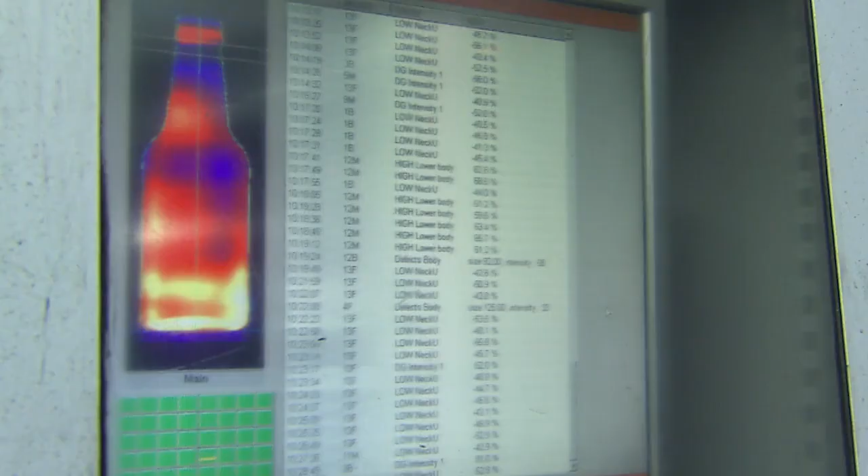More than 2,000 years ago, the first glass bottles and jars were made. Since that time, glass has continued to evolve, but the many great qualities have remained the same. As you will see, glass is made from natural, sustainable, raw materials and is 100% recyclable without any loss of quality or purity. Our customers count on us to consistently deliver innovative glass packaging that preserves the taste and freshness of the products inside. We invite you to take a look inside the science and art of glassmaking. It is a remarkable process where raw materials are converted into glass bottles and jars that contain the foods and beverages that you buy and use every day. Cheers to glass.

These glass containers may look empty, but a lot of science, engineering, and attention to detail go into making them. In fact, consumers nationwide trust glass bottles and jars to protect their foods and beverages, and many of them choose Ardagh Glass Packaging to provide distinctive glass containers.

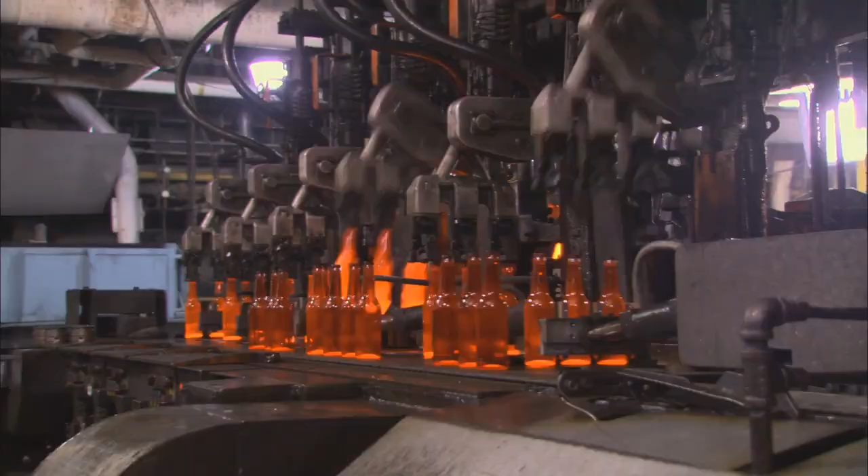We make approximately 6 billion glass bottles and jars a year. We are continually upgrading our facilities and processes to further improve the quality of the products and production efficiency. Ardagh Glass Packaging is focused on crafting quality in every container.

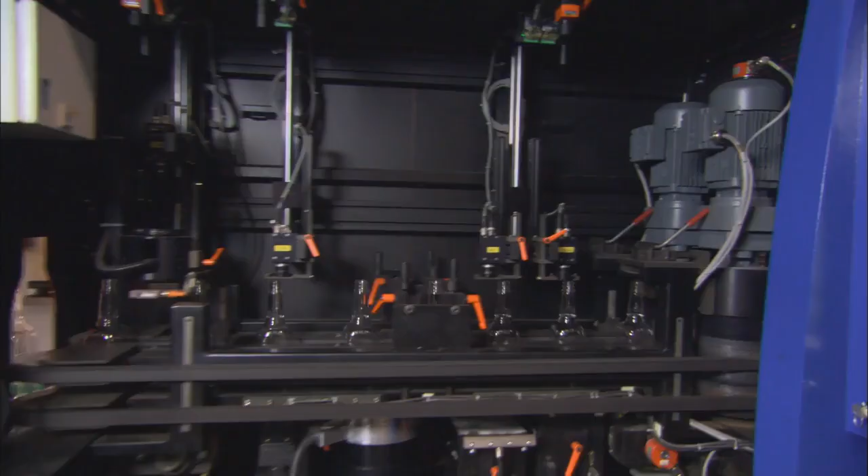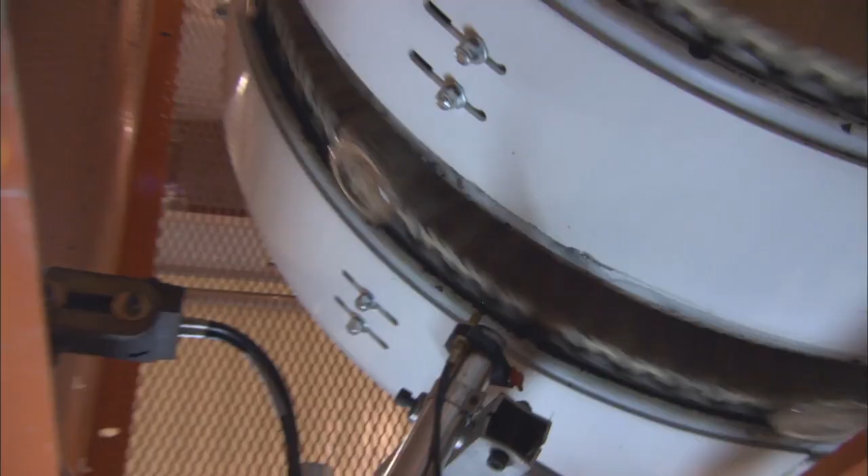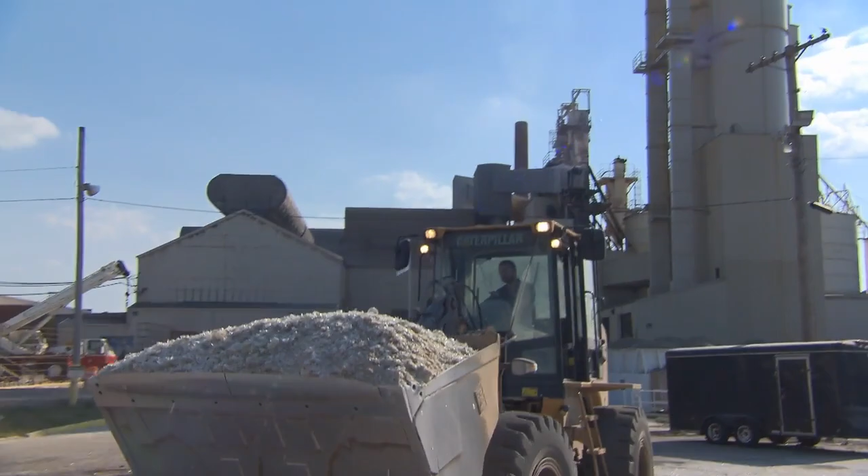Our scientists, technologists, and engineers identify emerging technologies and evaluate them in our manufacturing facilities nationwide. Technologies that pass these rigorous evaluations are gradually implemented into our manufacturing facilities. We have made a company-wide commitment to sustainability by reducing the use of raw materials, optimizing energy consumption, managing waste and water, and decreasing greenhouse gas emissions in all of our offices and glassmaking facilities.

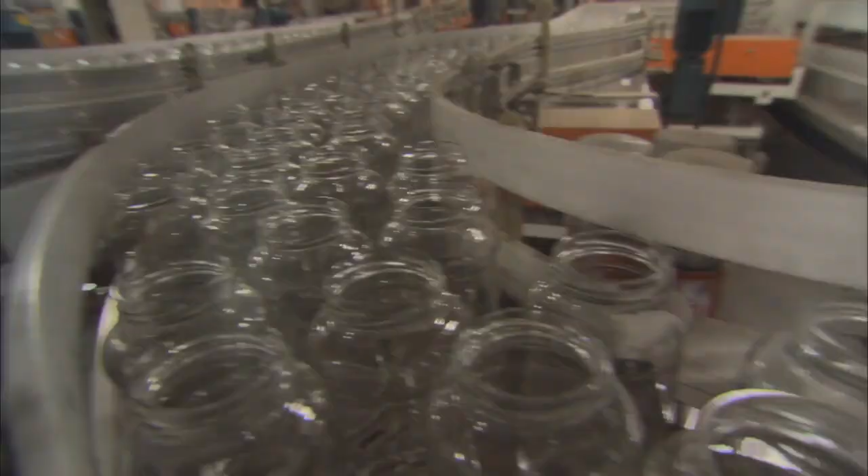We manufacture bottles and jars for the food, beverage, beer, wine, and spirits markets.

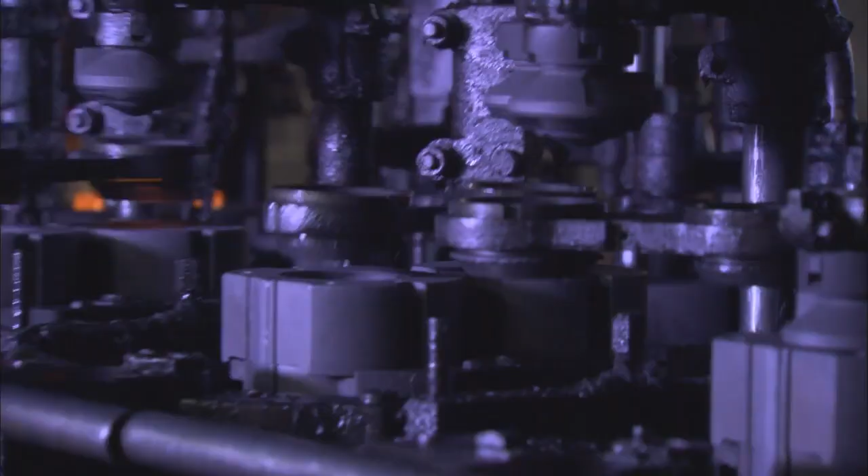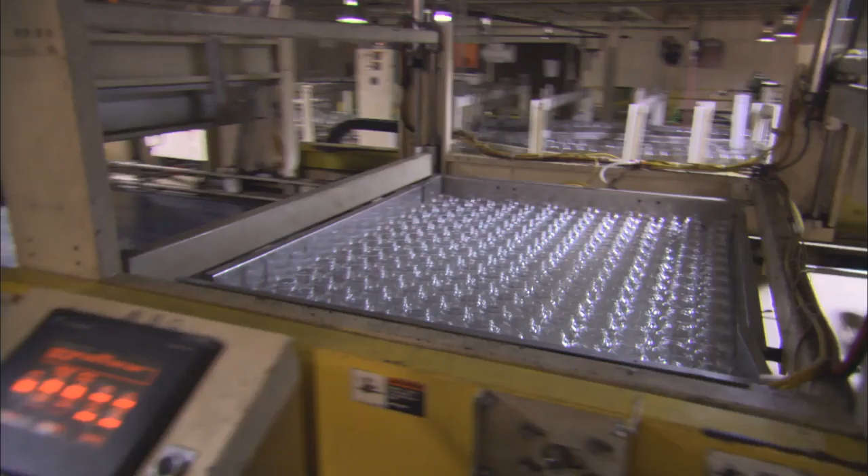Glassmaking is a very complex process. We meticulously control the production process from start to finish. Making glass containers that will stand up to customers' filling processes and consumer use is a demanding, highly scientific process.

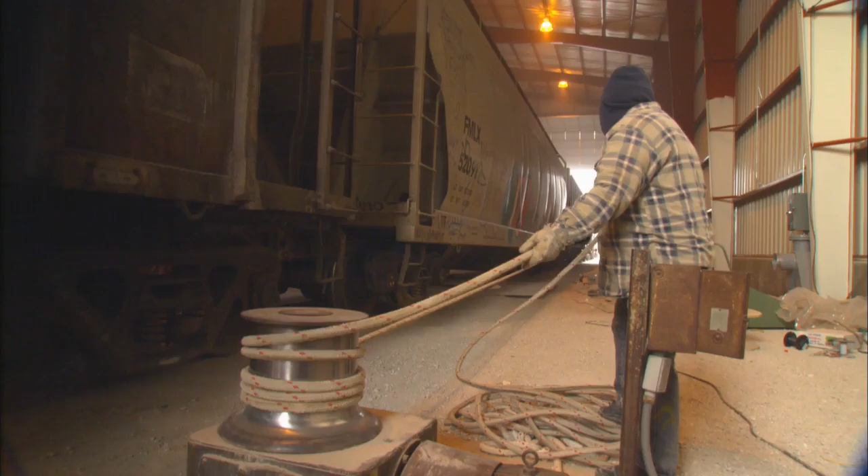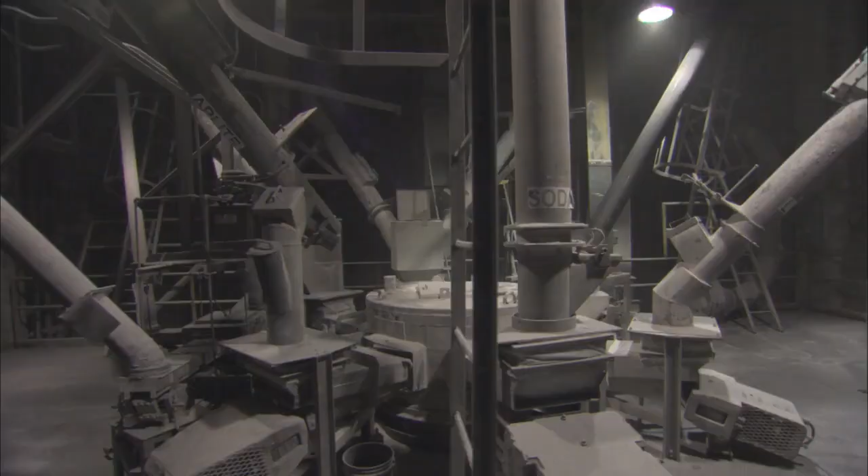The primary ingredients of glass are all found in naturally occurring resources, which include sand, soda ash, limestone, and dolomite. Upon arrival, these materials are inspected and stored in huge silos. Raw materials are conveyed to the batch house, where they are weighed and combined with minor ingredients to create the batch mixture.

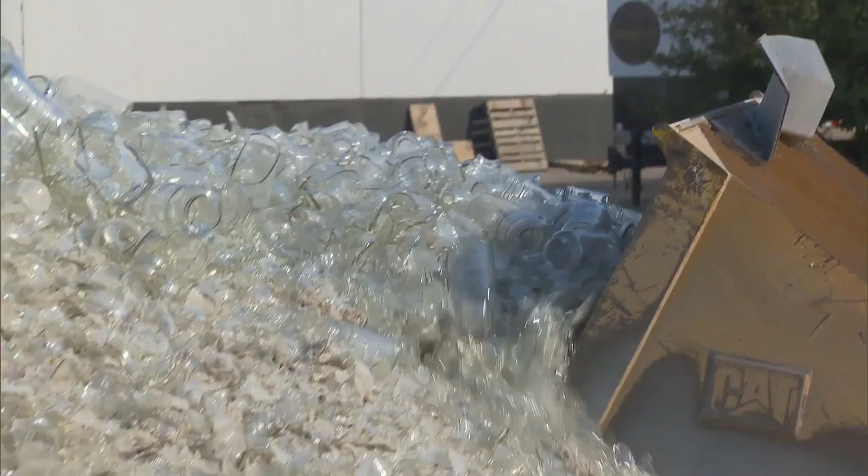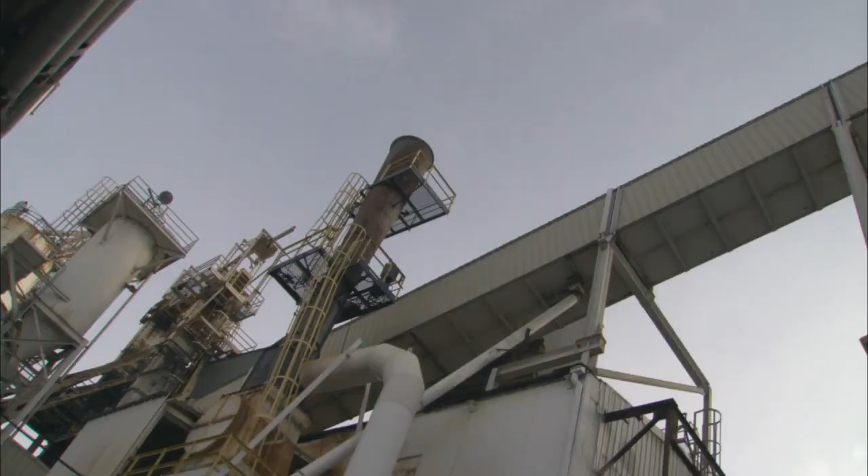Most mixtures include cullet, crushed recycled glass from consumer recycling and from our own operations. Cullet in our batch formulas normally ranges from 10 to 60%. Using recycled glass in the manufacturing process reduces the consumption of raw materials, lessens the demand for energy, cuts air emissions, and extends furnace life.

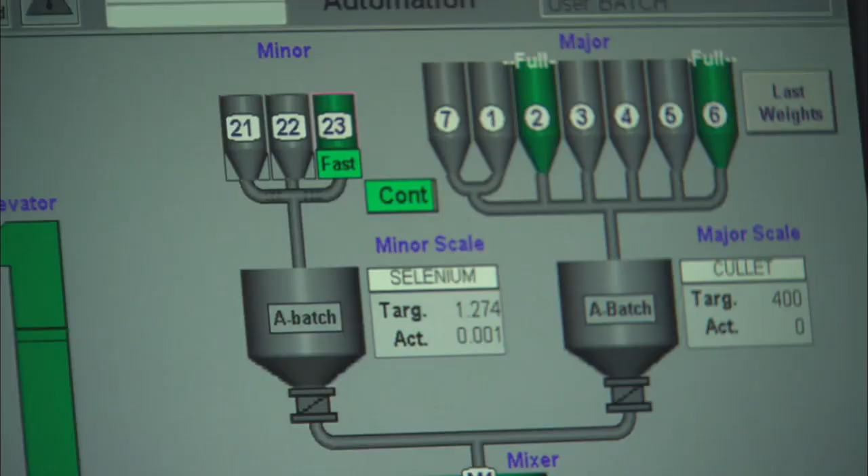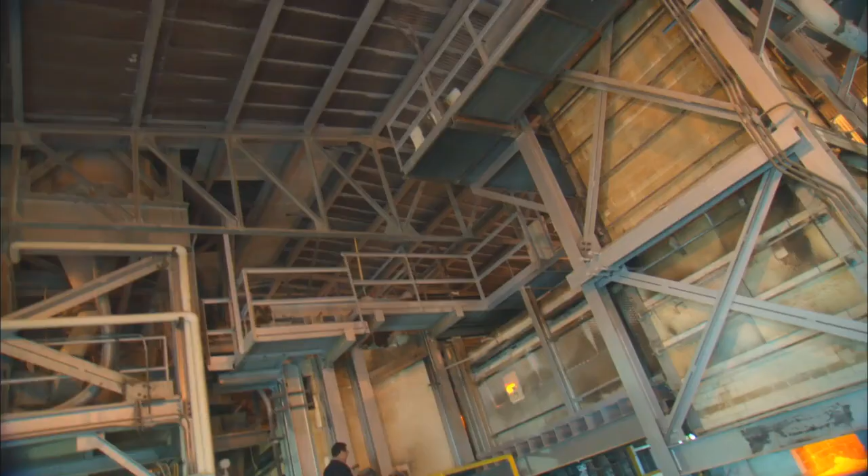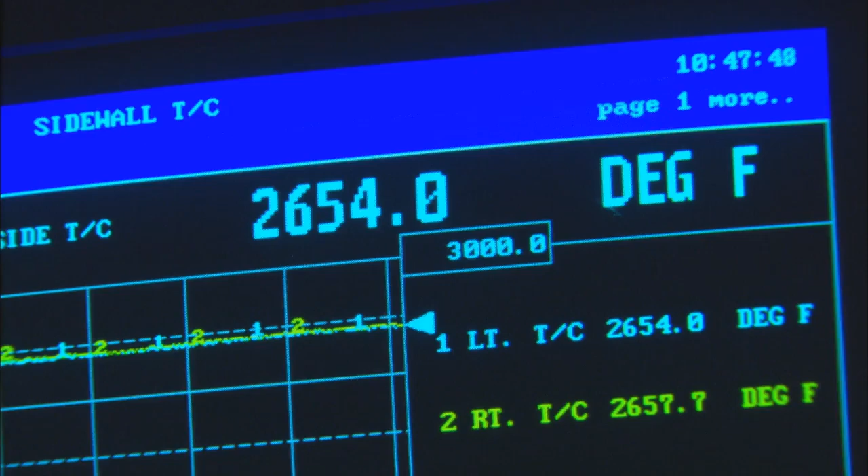The primary raw materials are weighed automatically. The recipe for the mixture varies according to the glass container to be produced. The precise mixture is conveyed from the batch house to the furnace, where it's heated to precisely controlled temperatures. The integrated furnace control console allows the operator to carefully monitor and control both the furnace and the batch house operations. Melting temperatures in the furnace are typically between 2,300 and 2,700 degrees Fahrenheit.

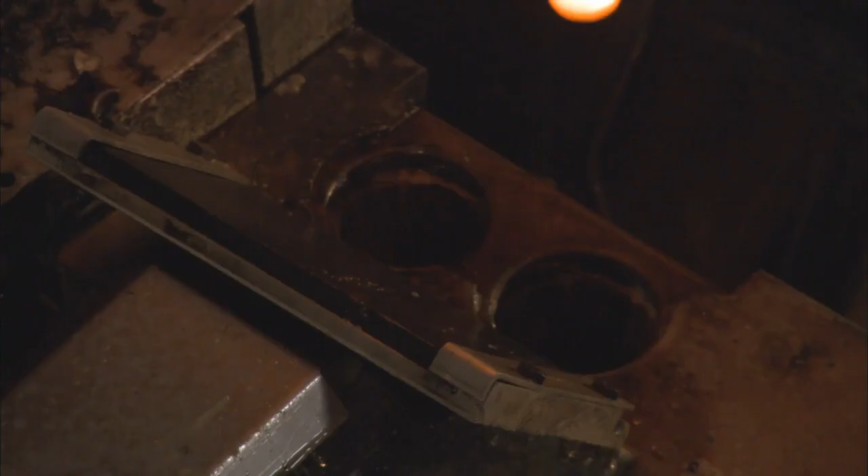Basically, raw materials are fed precisely into one end of the furnace, and uniform molten glass, ready to be formed into containers, comes out the other end. Complex mathematical formulas are used to calculate the precise amount of raw materials needed to ensure even flow.

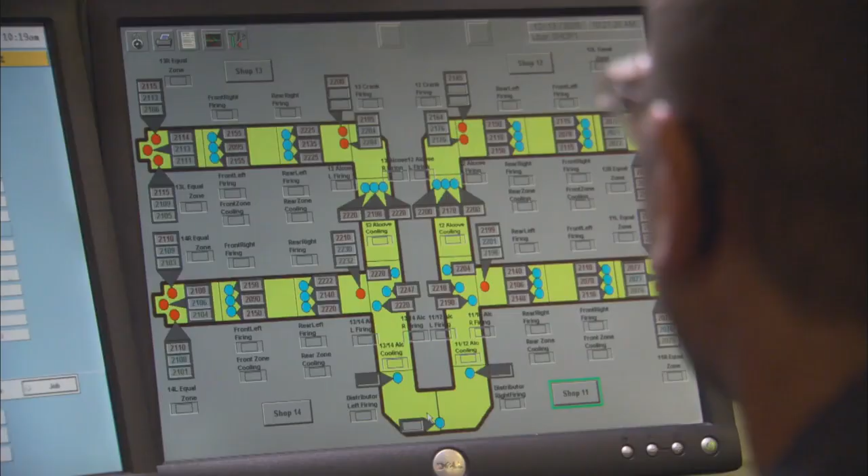The molten glass flows out of the furnace to the forehearth, where the temperature and viscosity of the glass is tightly controlled, using state-of-the-art thermocouples and control systems. A shearing and distribution system precisely cuts the molten glass into gobs and delivers them to the forming machines. Each gob is sized appropriately for the container being produced.

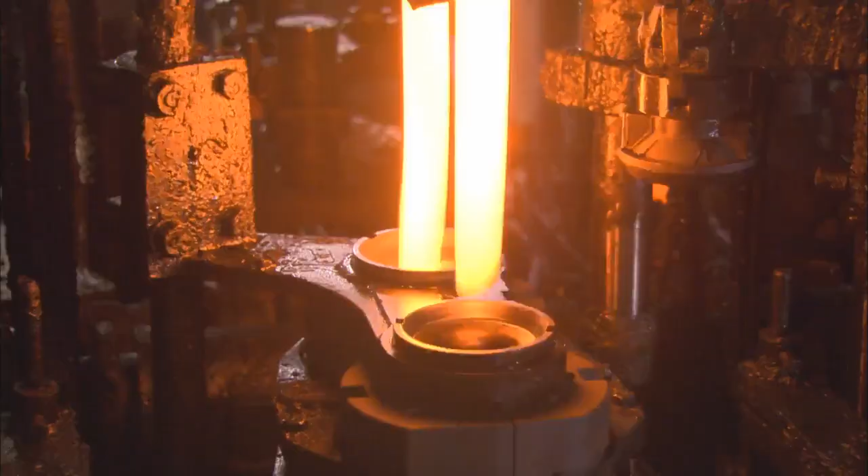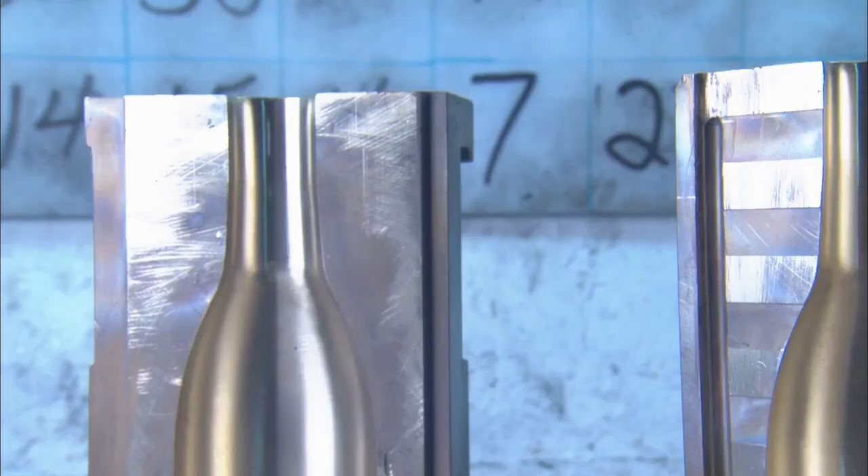We have developed and operate a variety of forming machines, ranging from an 8-section single gob, up to a 16 triple or a 20 double. The forming machines process the gobs into containers. A combination of the gob weight and dimension, along with the specific design of the molds being used, determine the shape of the finished container.

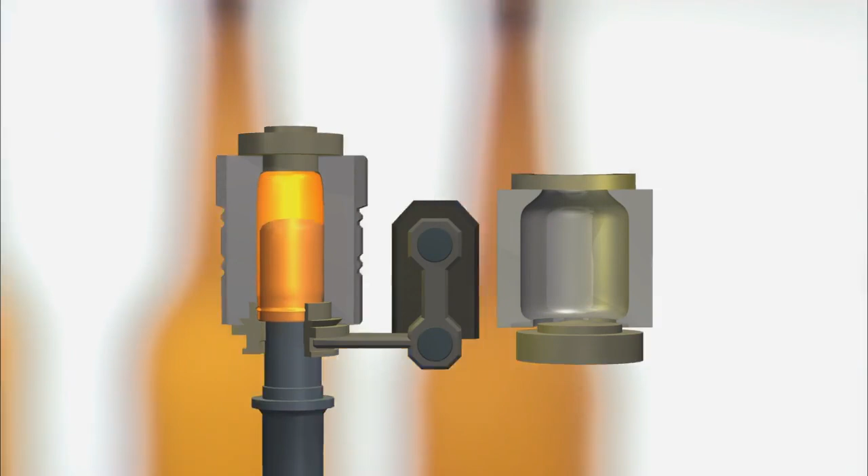There are 3 types of forming processes in which the molten glass takes on the shape of the mold: blow and blow, press and blow, and narrow neck press and blow. In blow and blow, compressed air forces the molten gobs into both the blank and final mold. In the press and blow and narrow neck press and blow processes, a plunger forces the gob into the shape of the blank mold with compressed air, completing the process on the mold side.

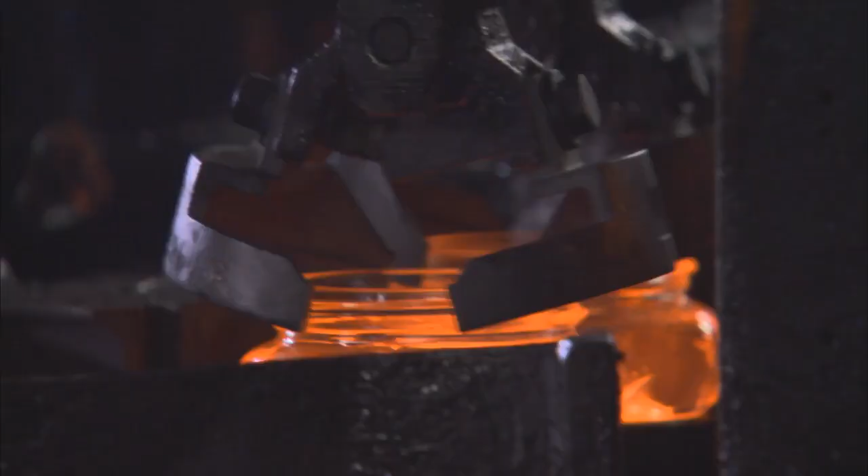Throughout the process, the forming machine controller precisely adjusts speed and timing, allowing exact control of the forming process.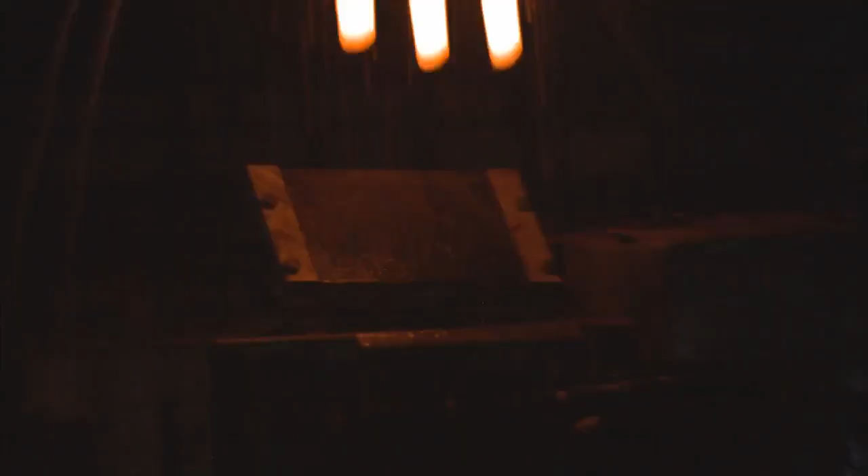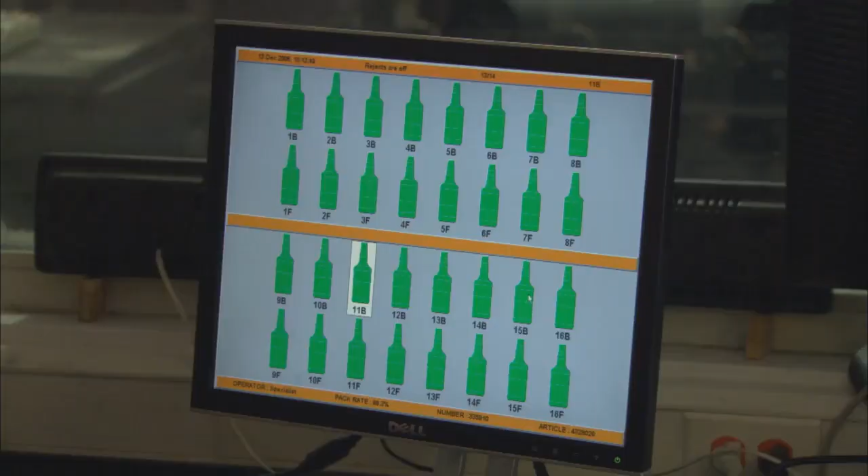We are continuously introducing sophisticated process monitoring equipment at this stage in the glass-making process. This state-of-the-art infrared thermal imaging equipment detects flaws in the finished containers, such as bubbles and inclusions. But more importantly, it highlights process-related problems, such as incorrect glass distribution and temperature that could result in defects.

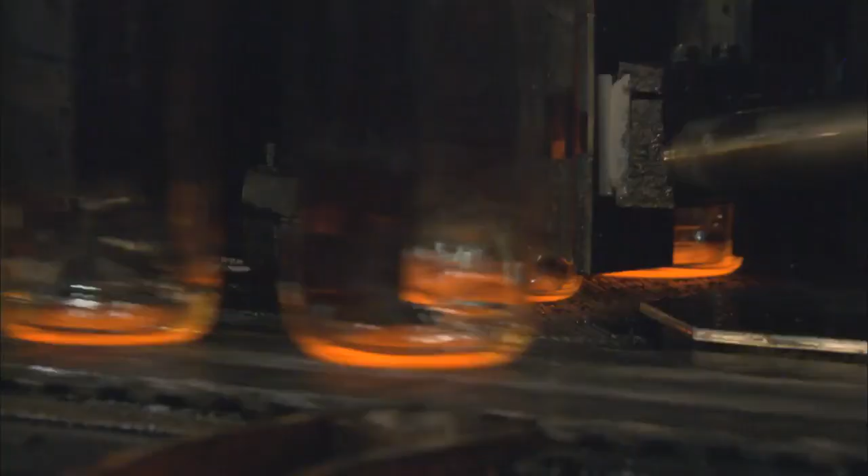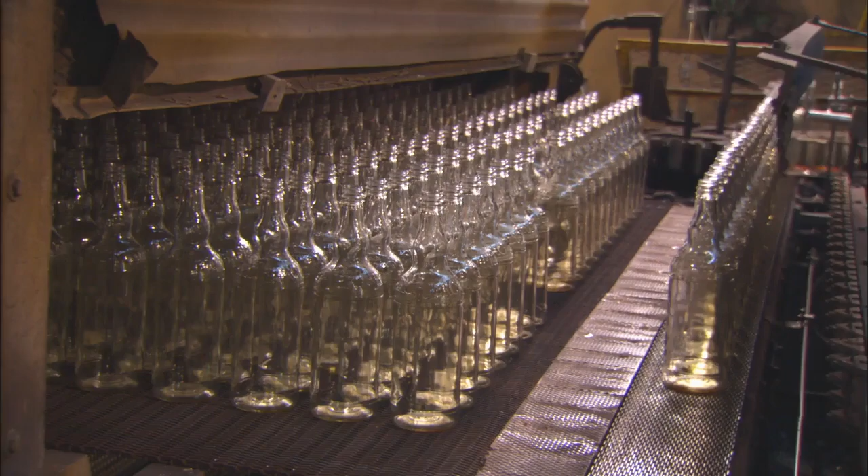This real-time information helps us spot and correct potential problems earlier in the production process, a significant move toward defect prevention versus inspection. When glass containers leave the forming machine, they're carefully placed on a conveyor for rapid and controlled cooling. Containers then progress to the annealing lehr, which is basically a giant oven that reheats the containers and cools them uniformly to relieve stresses in the containers, promoting the natural strength of the glass.

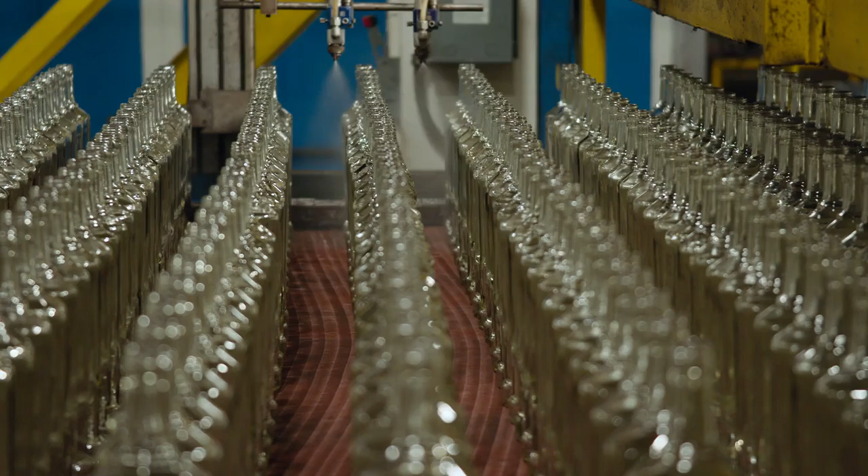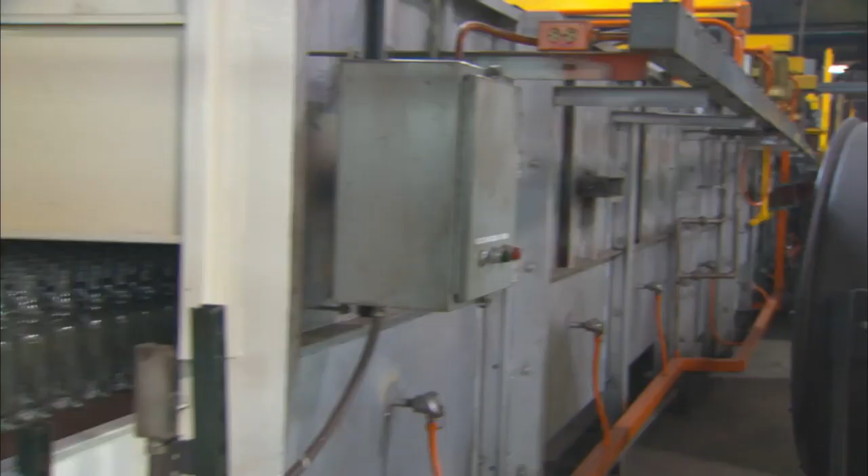When the containers are approximately 250 degrees Fahrenheit, the cold end coater applies a food-grade organic coating material that imparts lubricity for mobility in handling and further preserves strength so the containers run smoothly on our lines and those of our customers. In the fast cooling section, the containers are cooled to about 100 degrees Fahrenheit, cool enough to touch.

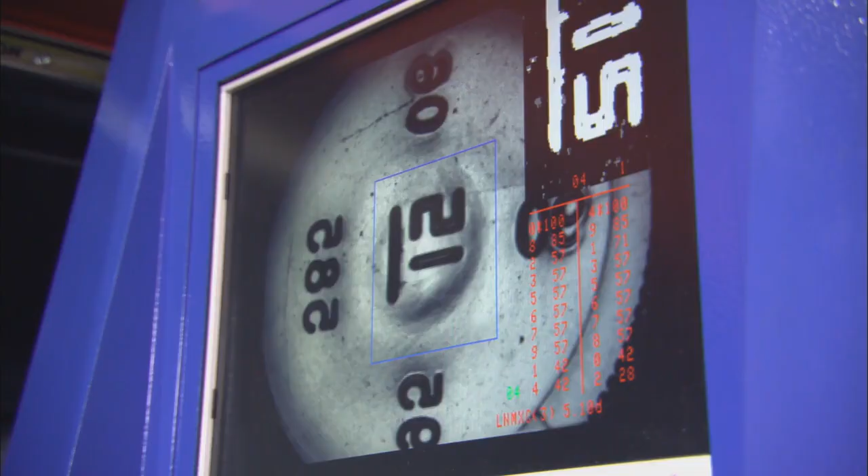Extensive online inspection and testing equipment ensures that the containers meet our standards and those of our customers. With an advanced system using multiple cameras, containers are viewed without rotation or contact. Sophisticated laser equipment detects sidewall and heel defects, including stress defects that cannot be seen by the naked eye.

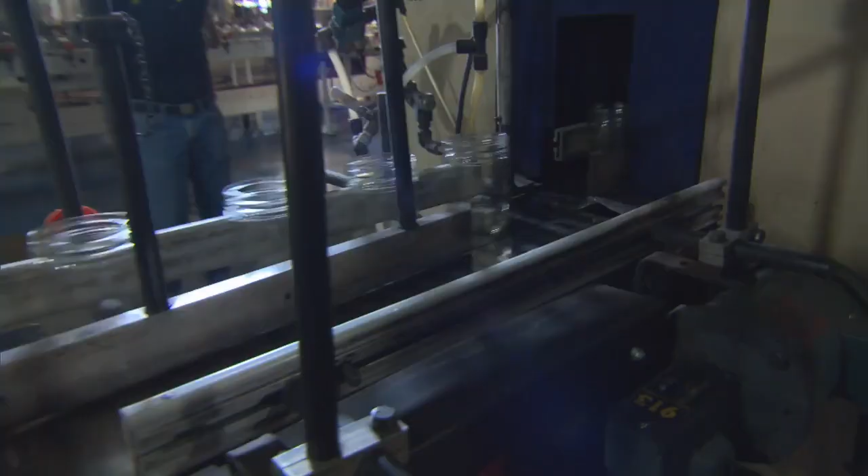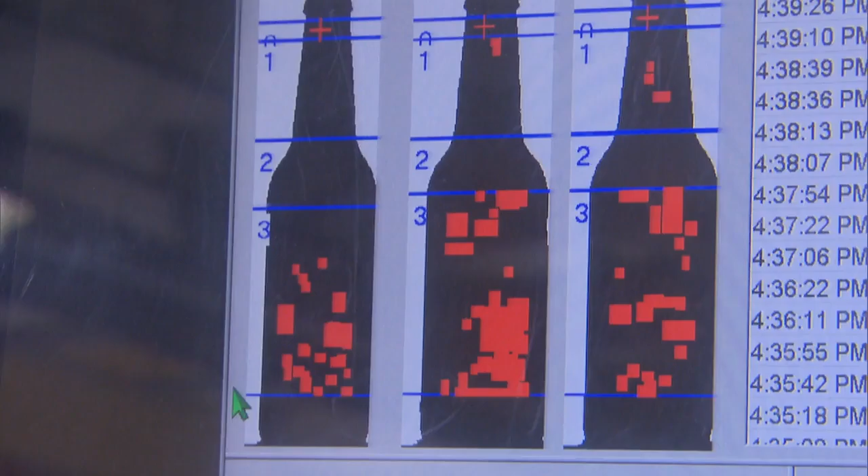Results are automatically reported to hot-end personnel, recorded and acted upon. Product issues are tracked by mold number and inspection points, allowing us to pinpoint any concerns in the production process faster. A squeezer checks for low impact resistance.

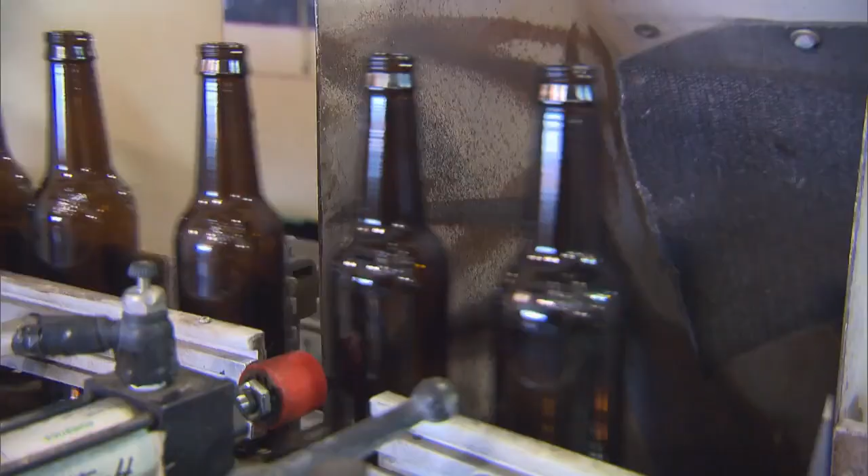Glass thickness is measured to within thousandths of an inch. This is the end of the line for containers with any imperfections. Rejected containers are not discarded, but are recycled as cullet and used in future batch mixtures.

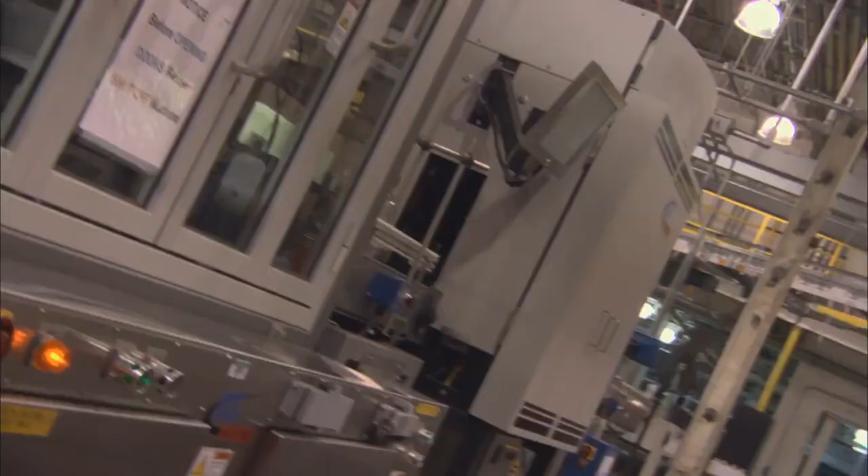But traditional online inspection is not enough. We have implemented state-of-the-art automated labs right in the plant, where sample containers undergo further detailed inspection.

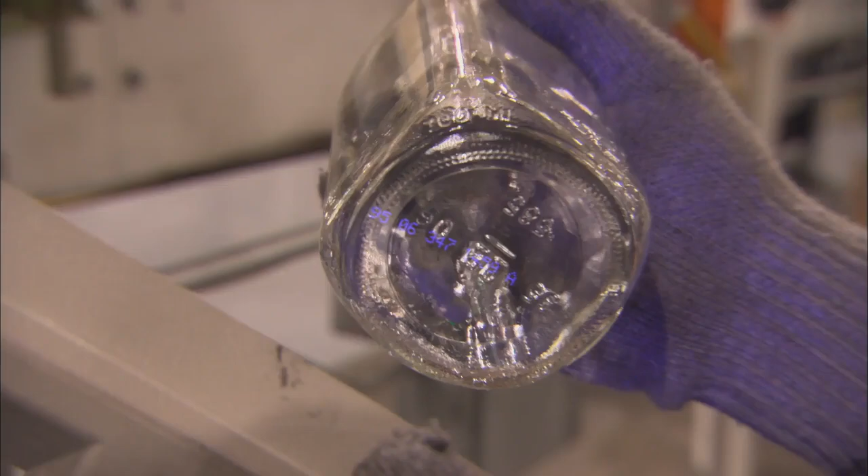Then they're dated to within 1 minute using either Videojet or laser jet coding. Videojet coding can be visible or invisible depending on customer preference. You'll see laser jet codes usually near the bottom of the jar. This code information is like the container's fingerprint.

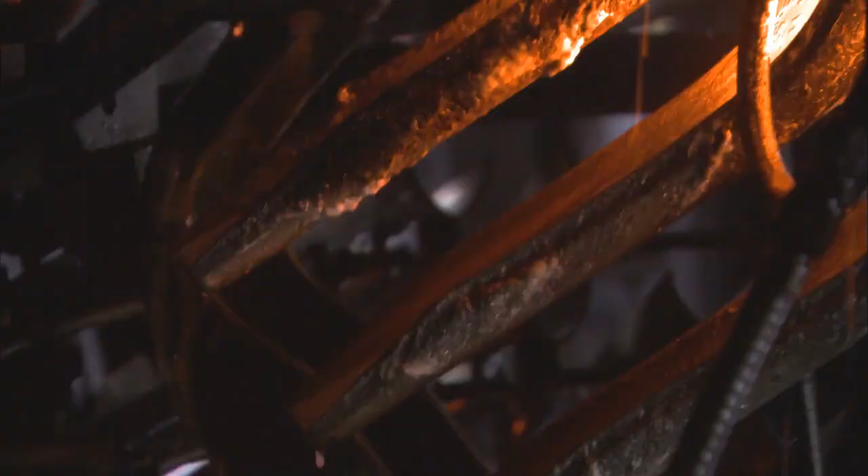With our combination of container coding and mold coding, if there are any concerns with our containers, we can precisely pinpoint and contain the production involved. Thanks to our constantly upgraded technology, we're making glass containers faster and better than ever before. We make them with care and we handle them with care.

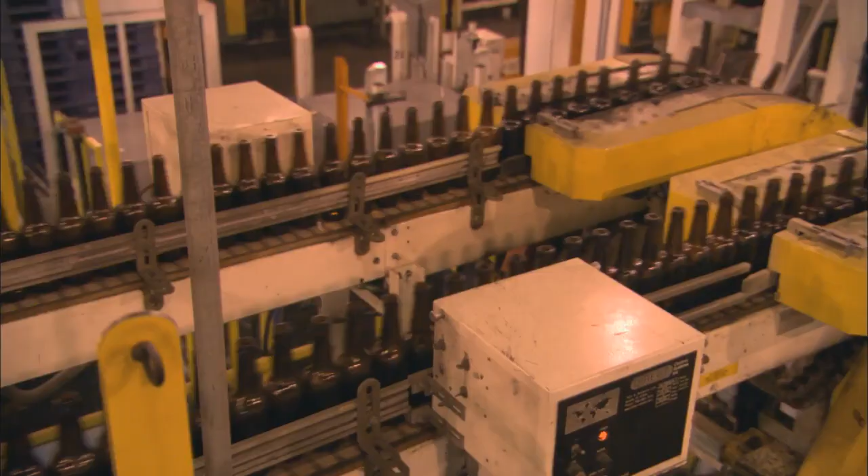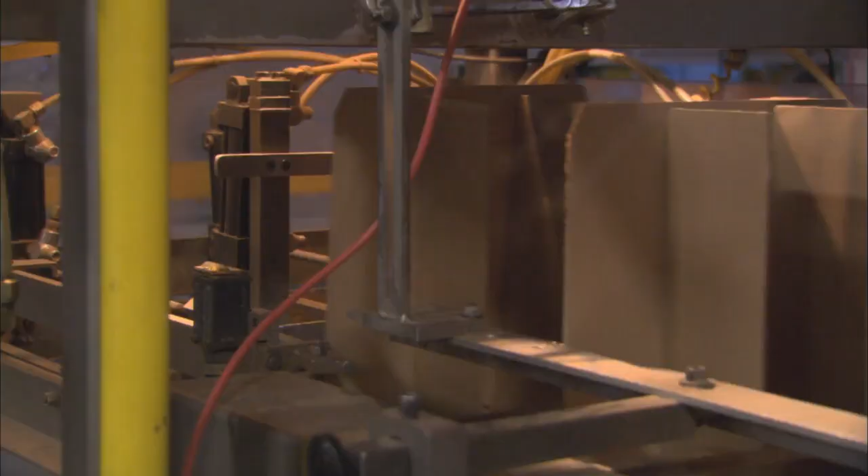Advanced ware handling procedures incorporate sophisticated drive and conveying systems. We offer options and flexibility in packaging to make ware handling easier for our customers. We provide precise specifications for cartons designed to protect the containers. We pack necks up or necks down.

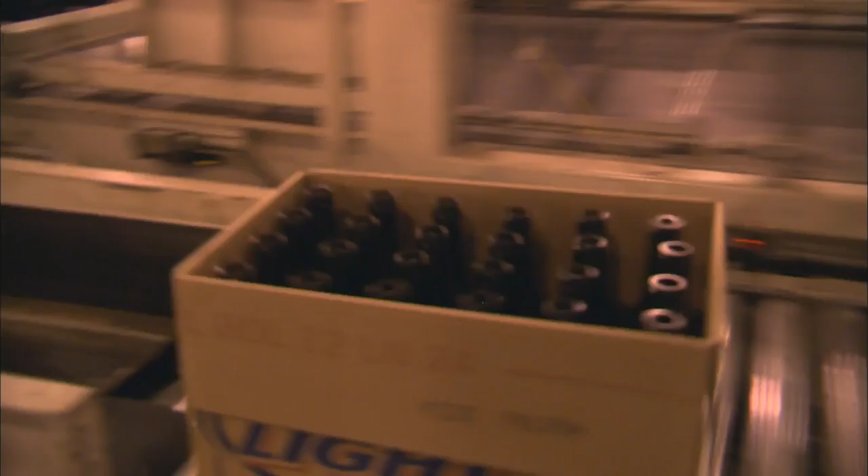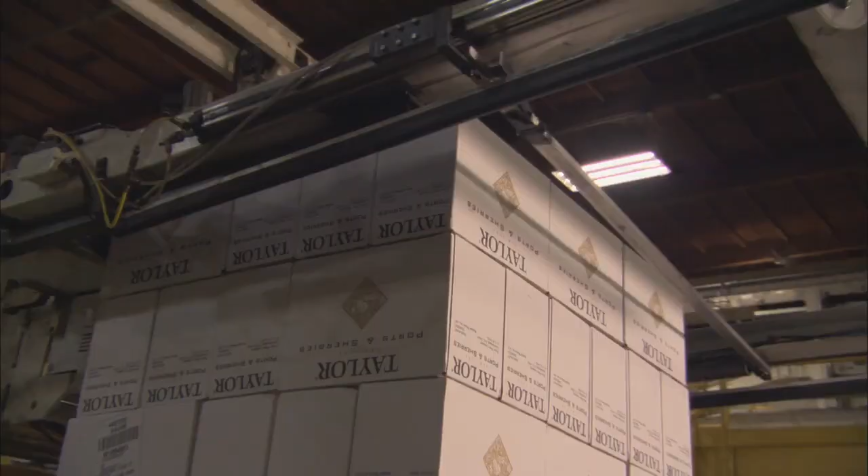Securely packed and sealed cases are conveyed to case palletizers, where they are stacked according to customer specifications to increase stability for shipment. For containers that will be shipped in bulk, the bulk palletizer stacks the individual containers in 5 to 15 layers. The strapper bands the pallets for added stability.

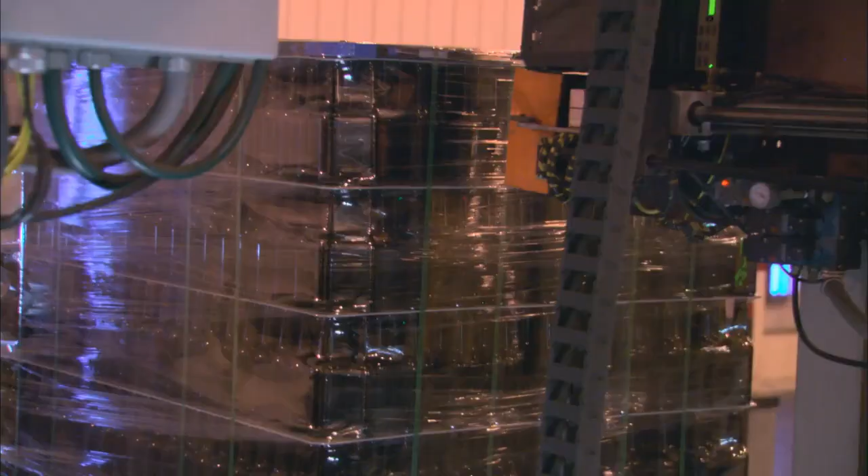Pallets are then covered with plastic wrap to protect against contamination and stabilize the load. The sturdy pallets are transported to the finished goods conveyor, where they are barcoded if the customer desires.

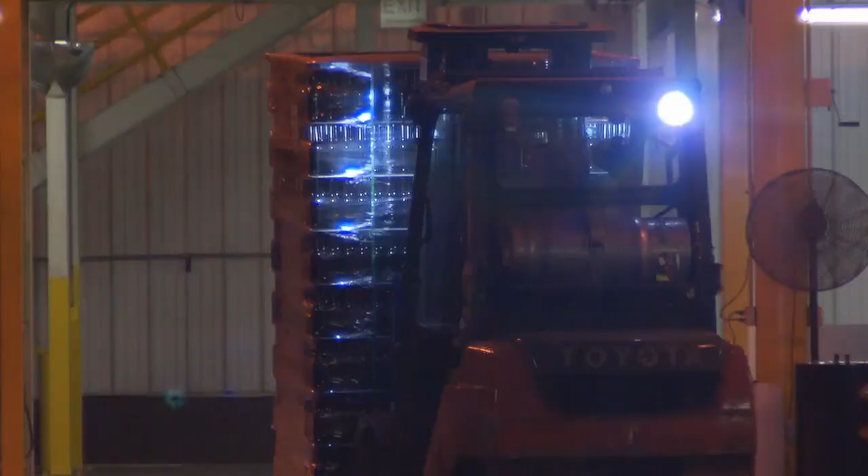This is the end of the manufacturing line. From here, containers go to the staging area for storage or for shipment to Ardagh Glass Packaging-North America customers. In many plants, we use laser-guided vehicles, enhancing the safety of our packages and improving ware flow.

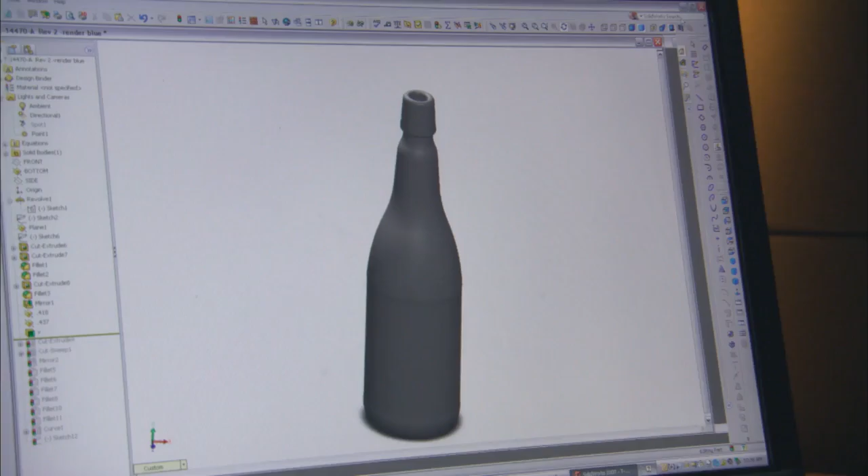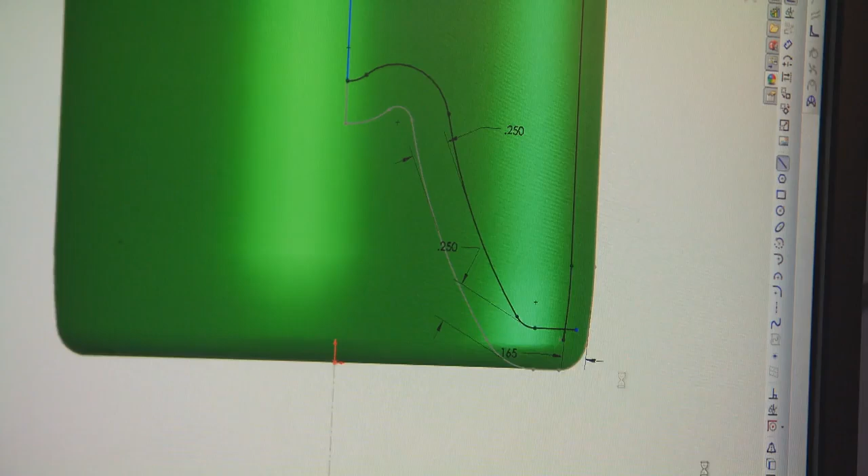Another important part of glassmaking is our new product development process. At Ardagh Glass Packaging, we are focused on bringing innovative design solutions to the marketplace. Our design team incorporates their skills and knowledge of glassmaking to add value to the packaging design process. Our use of 3D solid modeling allows us to develop creative concepts to exact size, weight, and fluid capacity requirements.

Our computer design system is portable and can be taken to any location, which reduces development time by bringing the design process to the customer.

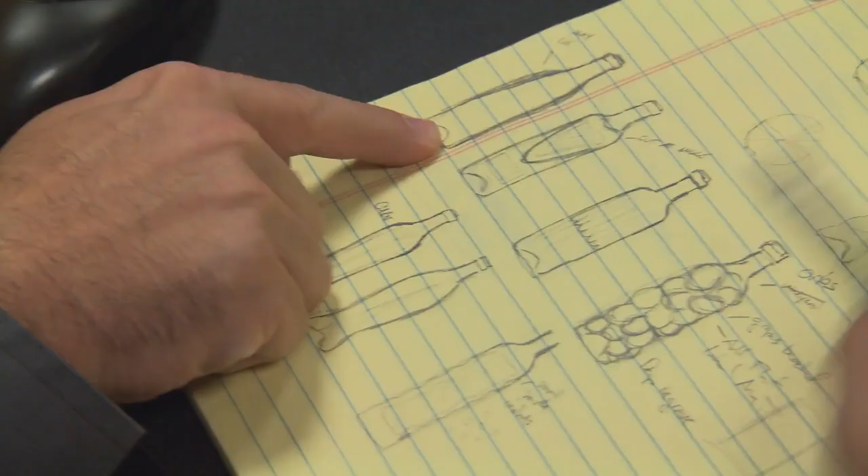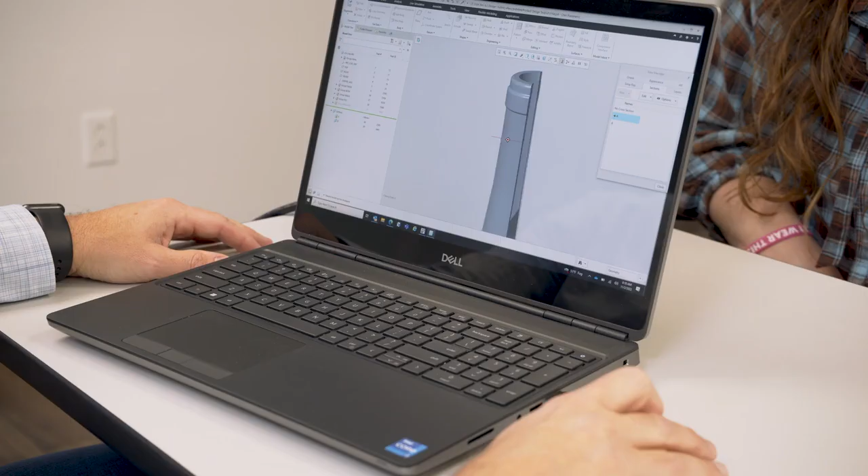Once a concept design is approved by the customer, we create a fully engineered and dimensioned print. Then we have the capability to print a 3D model or have a lucite model cut, polished and dyed to the required glass color. Once we have approval of the new bottle design, mold engineering begins the process of creating the drawings required to make the mold equipment to manufacture the new glass container.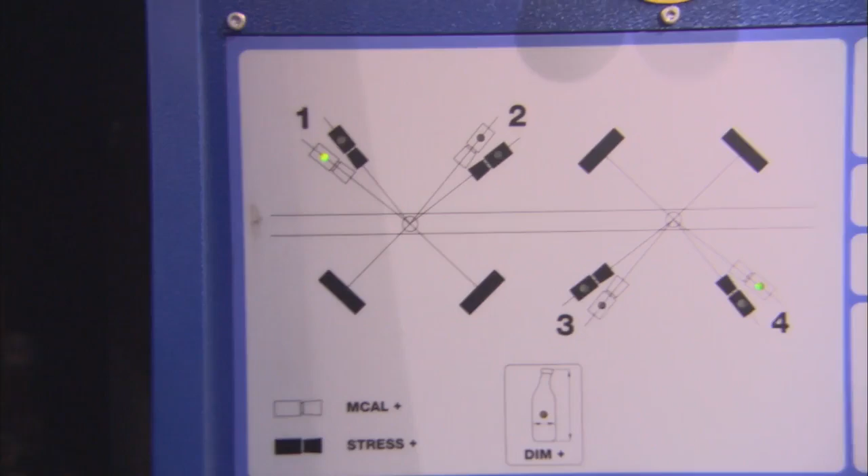Our proven process reduces the time required to introduce a container and ensures optimal manufacturing performance.

Ardagh Glass Packaging-North America has produced the glass bottles and jars for more than 100 products that have won Clear Choice Awards. We have access to the latest innovations in design and in manufacturing technology.

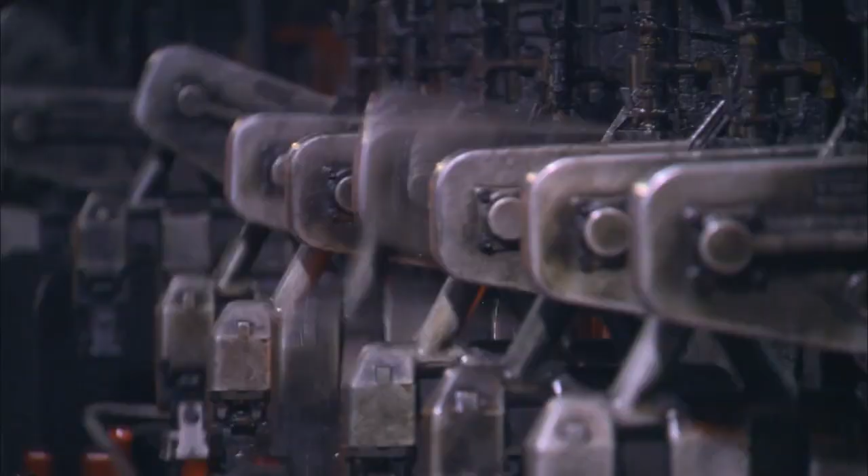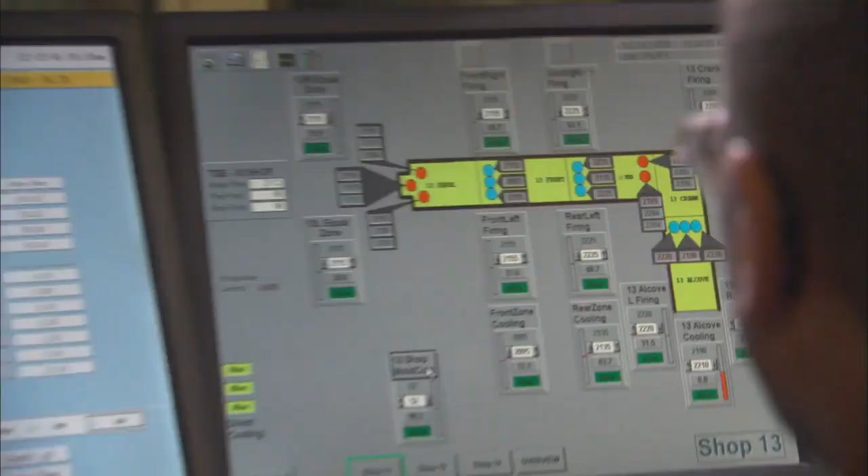With our commitment to quality, service, sustainability, and innovation, our state-of-the-art technologies integrated throughout the process, our continuous monitoring systems and high-tech inspection process on the hot end, on the line, and in our automated labs, and our comprehensive design and engineering services, Ardagh Glass Packaging is the choice of food and beverage brands throughout the world and is pleased to be recognized as a global leader for high-quality glass containers.